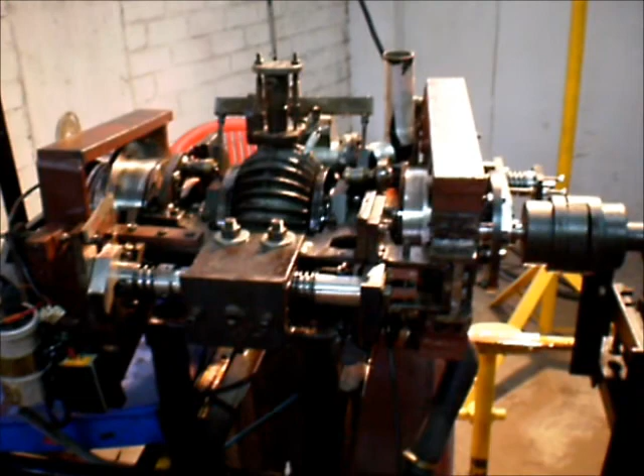Imagination and creativity are at the heart of most discoveries and inventions. Some dream of amphibian cars that drive underwater and on land, while others dream of cars that fly in the sky. We don't know what the future will bring, but we bring you the engine technology of the future.

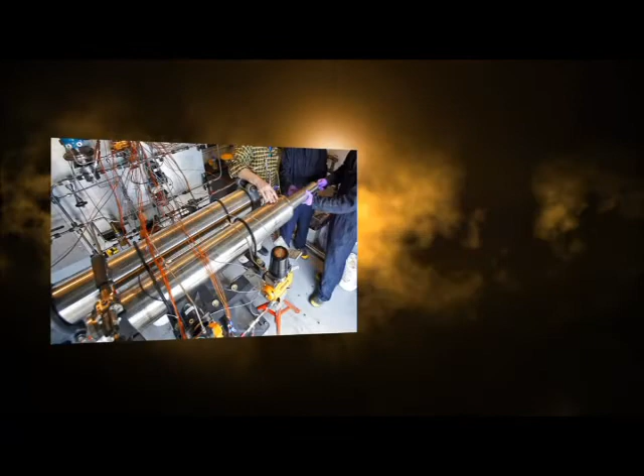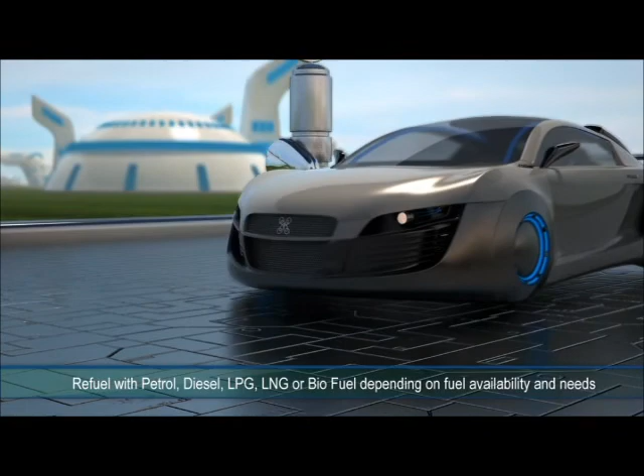One of the greatest challenges of the 21st century has been the effect of global warming linked to increasing gaseous emissions. Our world is also very dependent on depleting fossil fuel reserves, with fluctuating prices resulting in economic turmoil. Various scientists have been striving to find alternative fuel and energy solutions for a greener environment, with no concrete results yet. Imagine a car that can refuel its tanks with petrol, diesel, LPG, LNG or biofuel, depending on fuel availability and needs. This is not a dream anymore.

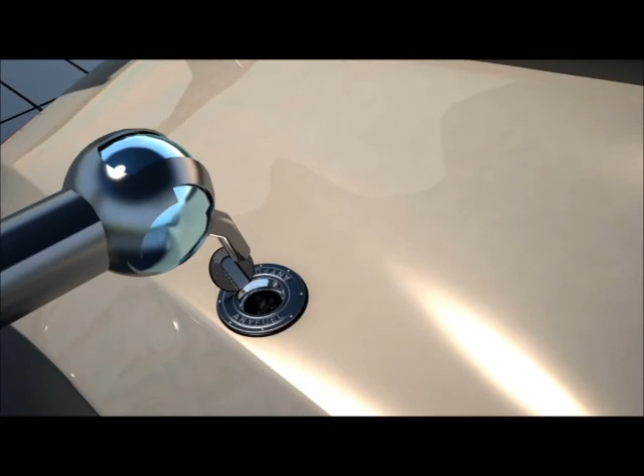The new rotary variable compression ratio technology, RVCR technology, invented by Das Ajee Kamat, will subsequently make the next generation of fuel-flexible and emission-smart internal combustion engines possible. This technology will ensure a smooth transition from fossil fuels to greener fuels without disrupting the current oil-based economic structures, whilst ensuring lower emission levels.

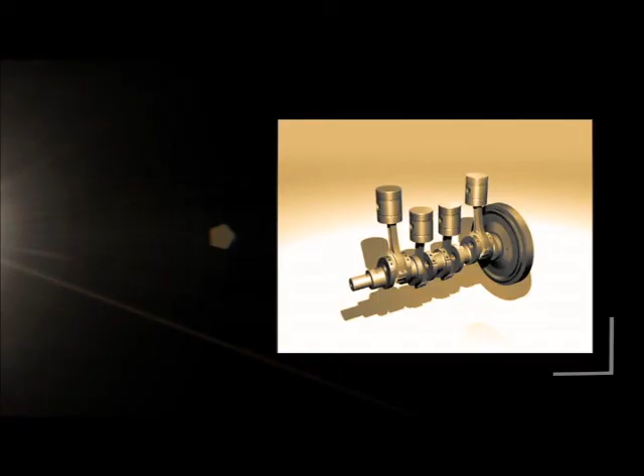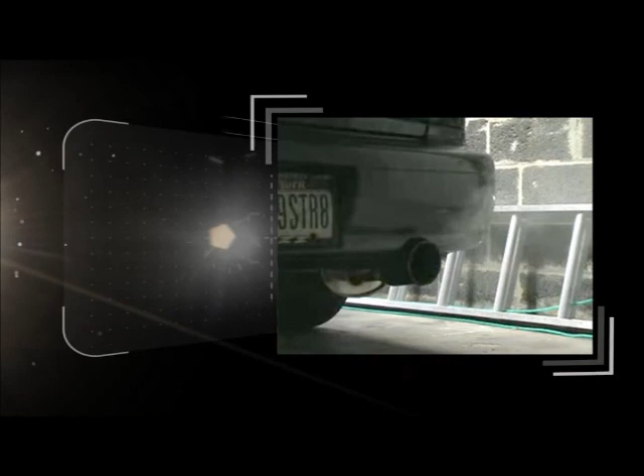When you consider current engines, they're based on the reciprocating piston crank mechanism that is more than a century old. This mechanism has not evolved and still guzzles an enormous amount of fuel while producing large amounts of harmful emissions. The engine can only function on one type of fuel and needs to be changed or adapted for other fuels. Current engines require 2 or 4 strokes to operate and produce a constant compression ratio, which makes the reduction of fuel consumption difficult.

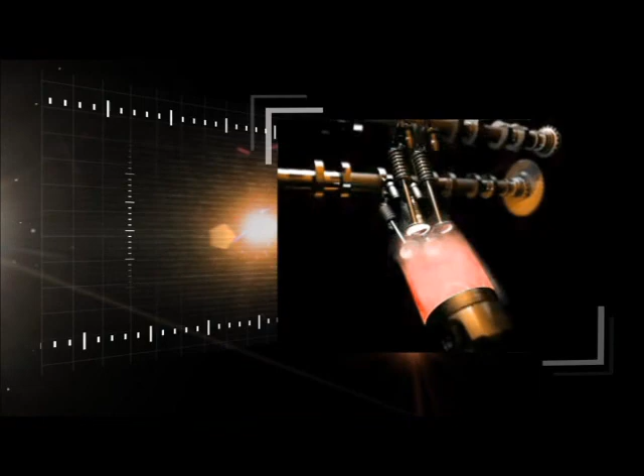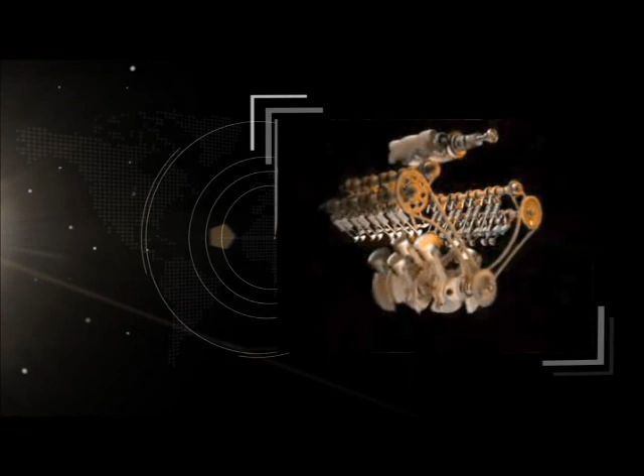The use of reciprocating pistons, complementary parts and flywheel increase engine weight and add to the metal cost. The engine cylinder block, together with the crankcase, increases the engine size and amplifies the risk of crankcase explosions, thus requiring additional safety features.

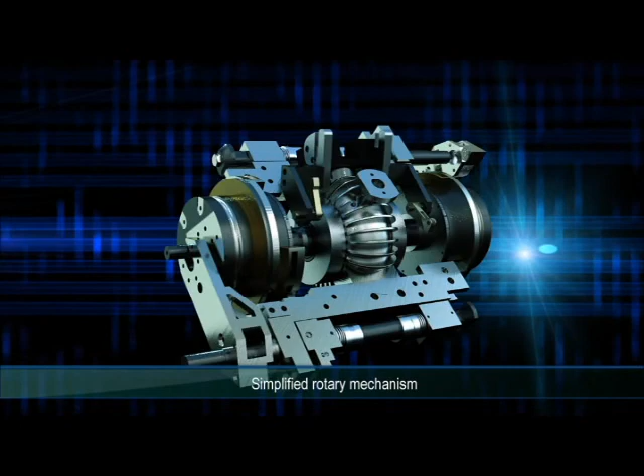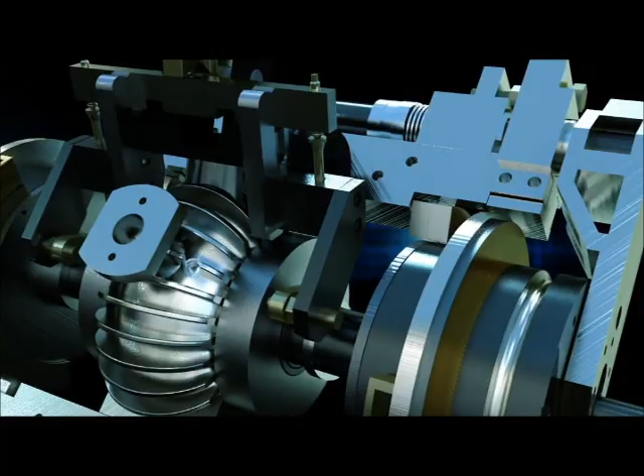RVCR technology is based on a simplified rotary mechanism, which allows the compression ratio to be varied analogously through a broad fuel spectrum for better fuel consumption by the same engine. Variable compression ratio, VCR, is empirically accepted as enabling fuel efficiency to be increased by 30%.

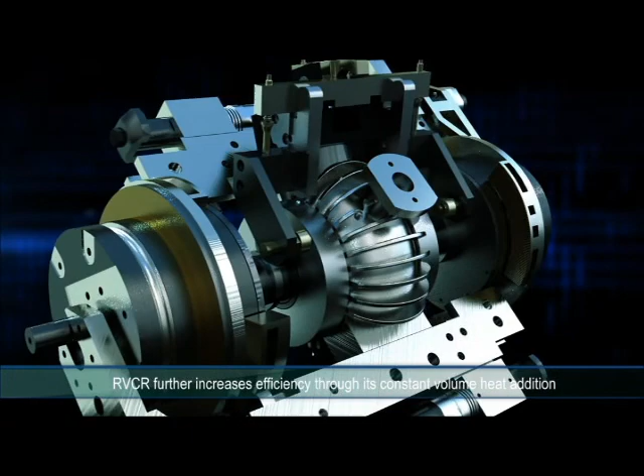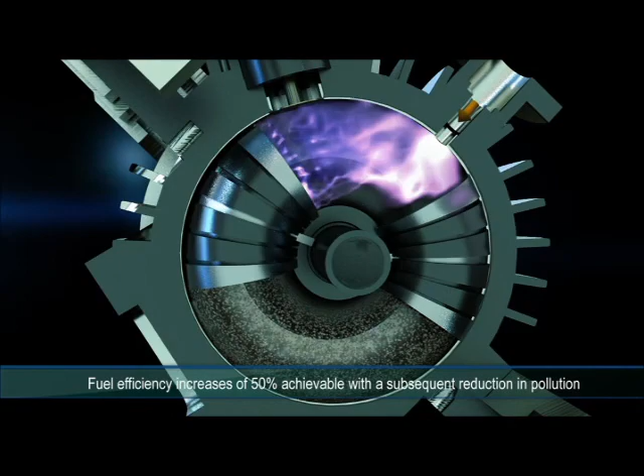RVCR further increases efficiency through its constant volume heat addition, which is not possible in any other engine. Hence, fuel efficiency increases of 50% should be achieved with a subsequent reduction in pollution. This is the ideal solution for an improved control of emissions, compatible with more stringent regulations required for a greener and more environment-friendly planet.

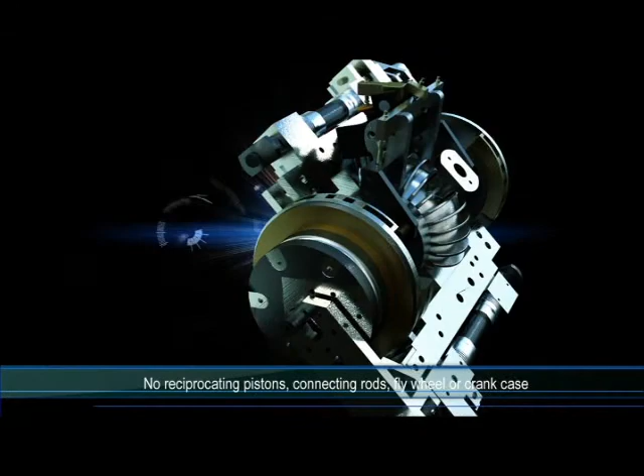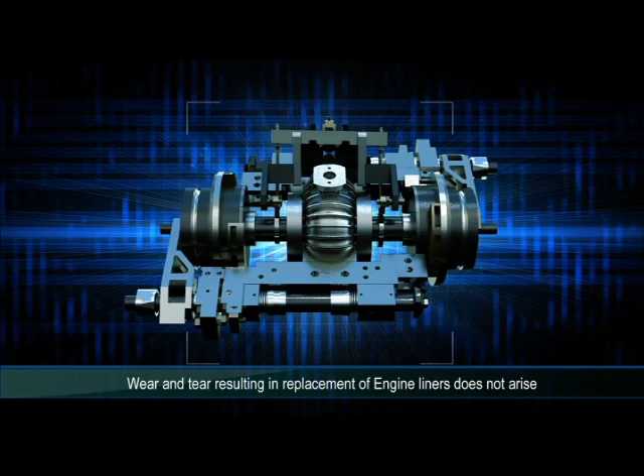RVCR engines require no reciprocating pistons, connecting rods, flywheel or crankcase, etc., leading to an overall reduction in engine size and weight. The wear and tear in conventional engines resulting in the replacement of engine liners does not arise in RVCR engines, increasing their lifespan.

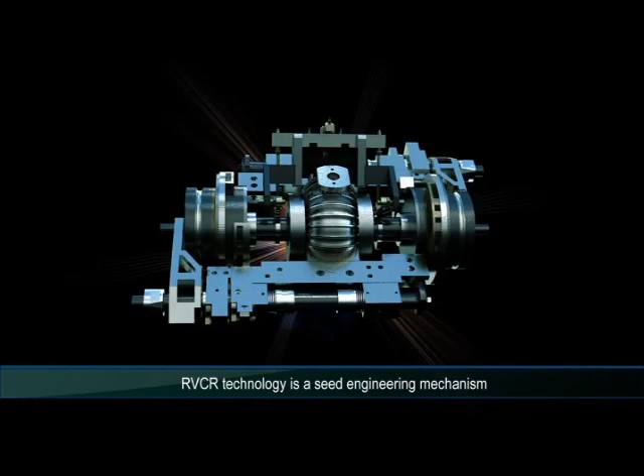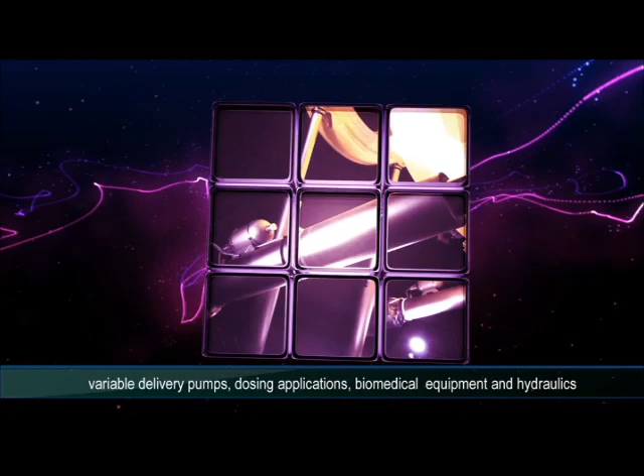RVCR technology is a seed engineering mechanism that is not just limited to engines and is applicable to a broad spectrum of engineering applications, such as metering devices, variable delivery pumps, dosing applications, biomedical equipment, and hydraulics, or even for the harnessing of wind power or tidal power to generate electricity.

You realize the quantum leap in technology that has been made possible by the invention of RVCR. You most likely see tremendous potential for this new invention, with endless possibilities for improved engine performance in various sectors, and a considerable reduction in harmful emissions.

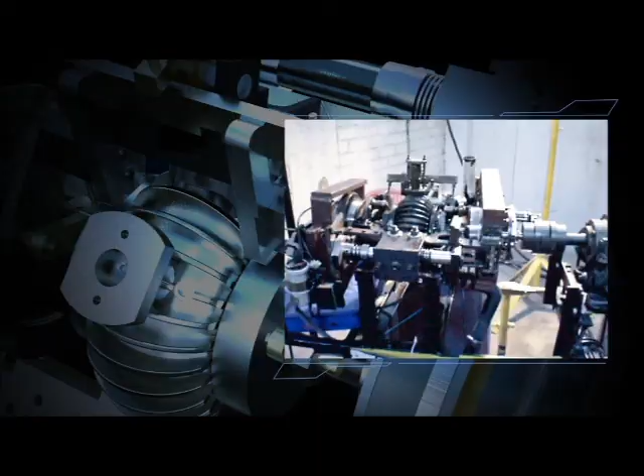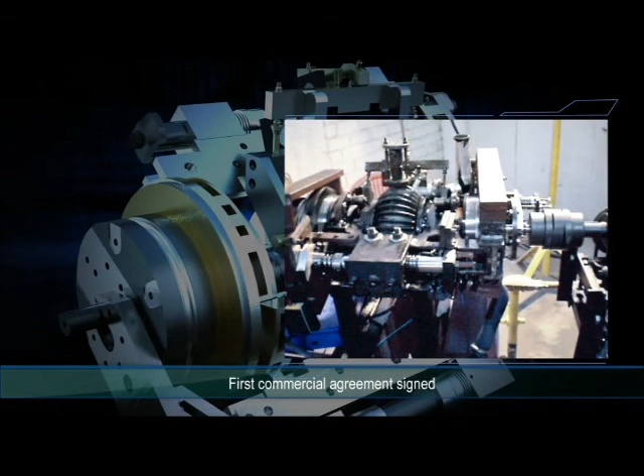This is not just a concept technology, as prototypes have been created and tested while research and development activities are nearing completion. More importantly, the first commercial agreement has already been signed, which gives even more credence to RVCR. Intellectual property rights have further been secured in over 43 countries, while patents have been granted in all leading economies to this date. This is the ideal opportunity for you to invest in the technology of the future.

Early adopters of new technology eventually lead the market. RVCR technology is not just about a single product. It brings core competency that ultimately results in an array of products. We are keen to partner your company and bring RVCR technology to your markets.